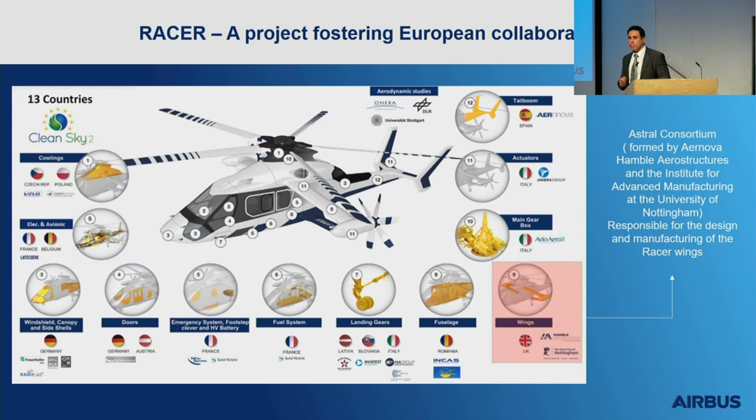Now, what are the main objectives of this project? We want to demonstrate that we can fly 50% faster than a conventional aircraft. We want to demonstrate that we can cover twice the surface that a conventional helicopter can cover in 1 hour. And while doing that, we save some emissions, both in terms of fuel consumption and noise footprint. On top of that, we want to demonstrate the affordability of the formula, because the best innovation is the innovation that is able to meet the market needs.

What are the missions where speed matters? There are many missions in the civil world, like search and rescue, emergency medical services, intercity shuttle, police missions, where speed will bring added value to the citizen and the potential customers we have in front of us.

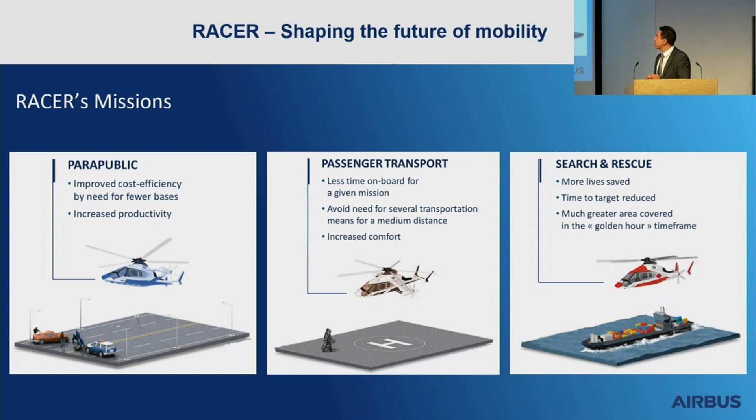So now let's go a little bit more into the technical field, how the Racer formula works and flies. What we have to consider is that the limiting factor for conventional helicopters is the speed at the tip of the main rotor blade. When you add the rotational speed and the advancing speed of the aircraft, you are close to Mach 1, and it's something that is not viable for a safe flight - this is our limit.

So the first thing you have to do when you want to fly faster is to decrease the rotational speed of the main rotor. When you decrease the rotational speed of the main rotor, you have less lift. And that's why we have the wings, because as we have less lift, we need to compensate.

And then the second parameter that is key for the high speed is the drag. We need to reduce the drag at the minimum, otherwise the formula will not be competitive in terms of power needs, efficiency, speed that we can reach.

For that, we want to keep the rotor as flat as it can be, with not a lot of collective pitch, not a lot of cyclic pitch, and if possible, zero. So that the rotor at the end is very flat and acts like a wing. And we don't use the main rotor to provide the propulsion force to reach the speed.

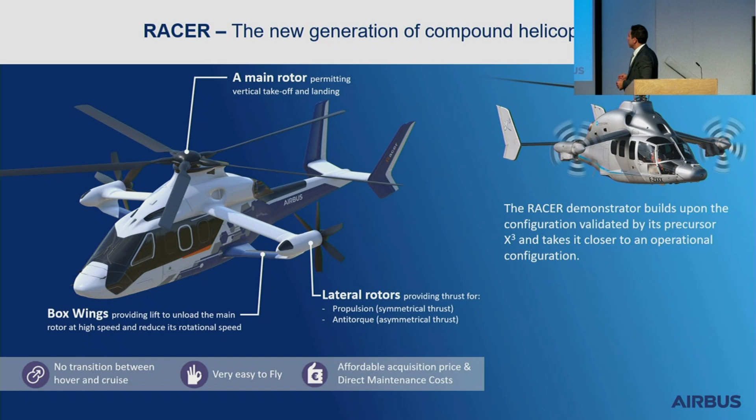I spoke about the drag, and I want to illustrate a bit the efforts we did in order to reduce the drag. A little bit later during this presentation, I will give you some numbers, but first of all, I will describe the theory that we had.

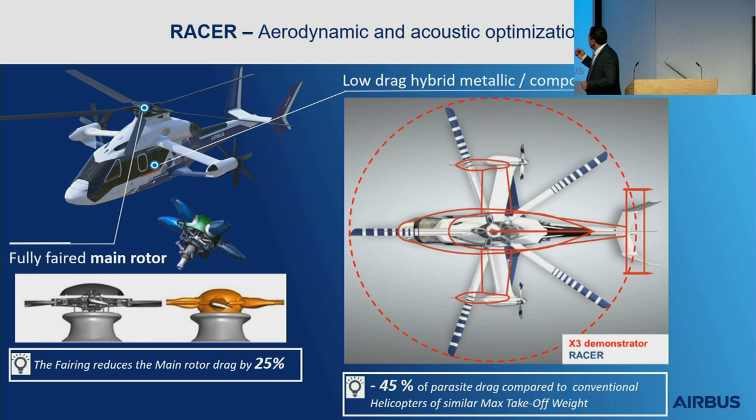In red, you have the lines that represents what should have been the X3 if we would have done it at the same weight of the Racer. So you have seen that between the X3 and the Racer, we did a lot of efforts, mainly on the fuselage, to limit the width at the minimum without jeopardizing the comfort.

In parallel, we worked a lot on the main rotor with a full fairing of the main rotor so that we limit the drag at the very minimum, and you can see that theoretically we should be able to save 25% of the drag of the main rotor. And in total, in theory, we have a reduction of 45% of the drag when we compare to the helicopters that is in the same range in terms of mass.

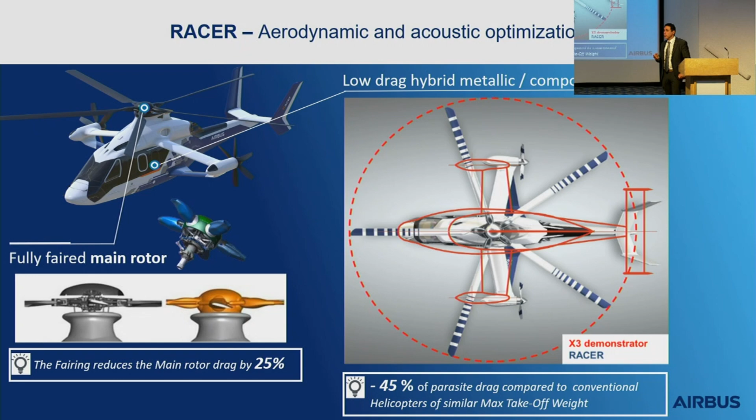I told you the wings are a key element of this formula, and it is true. And I will explain you why. There are some reasons why between the X3 and the Racer we decided to implement these box wings.

The first is that we decided to put the lateral rotors in pusher position and to implement the box wing so that it protects the people that want to embark or disembark in the cabin. In fact, we created a safety area that you can see here where the blue arrow is, so that the people are in total security when they embark and disembark in the aircraft.

There is approximately 7 meters to walk when you disembark to be close to the lateral rotor blade. And it's protected by the box wing.

The second reason to implement the box wing is the fact that when we have only one wing, we penalize the formula because seen by the rotor, the surface of the wing is quite big, and the downwash effect is detrimental for the hover phase. When we are able to superimpose the two wings, we limit the surface seen by the main rotor, and we improve the performance in hover.

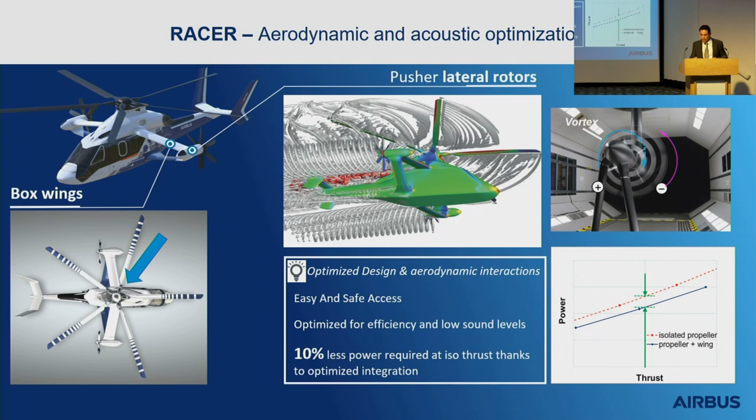We also have an asymmetric tail boom, patented, as well as the box wing, on this demonstrator. This asymmetric tail boom is here to improve performance in hover. When the downwash of the rotor blows air through the profile we've defined, it creates a force in the lateral direction that helps the lateral rotors provide the anti-torque function. We expect about 10% improvement. And here again, this is something we've already checked during the 8 hours of flights we performed. It works.

By the way, this is one technological brick we can use on conventional legacy fleets, because it will also improve the hover performance of conventional helicopters.

On the left side, you also have the flaps mentioned. On both the upper and lower wings and the vertical fin, we have flaps actuated with electromechanical actuators. These are secondary flight controls we use to fine-tune the equilibrium of the aircraft during all flight phases we want to optimize. I'll come back to this a bit later when I speak about noise reduction.

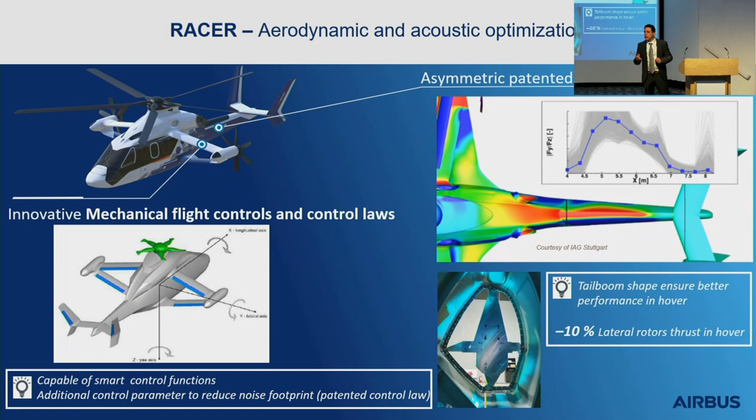And on top of that, all the upper deck - engines, main gearbox, rotor mast, rotor blades - are fully compatible with a conventional aircraft. You can take it and put it on a conventional aircraft, and it works.

In the specification of the main gearbox, co-developed with our partner Avio Aero in Italy, we put the requirement that it shall be compatible with a conventional aircraft. It means we have the capacity to implement a rear output so that we could transmit the torque to a tail rotor if we want to use it on a conventional aircraft.

And then you have to come back a little to the affordability I mentioned at the beginning of the presentation. We believe that if we're able to provide solutions that can be used both in conventional architecture and in high-speed architecture, in the end, for potential customers, civil or military, it will be an advantage. All the systems I described here represent the main part of the cost of a helicopter, both for acquisition and also for operational costs, notably maintenance.

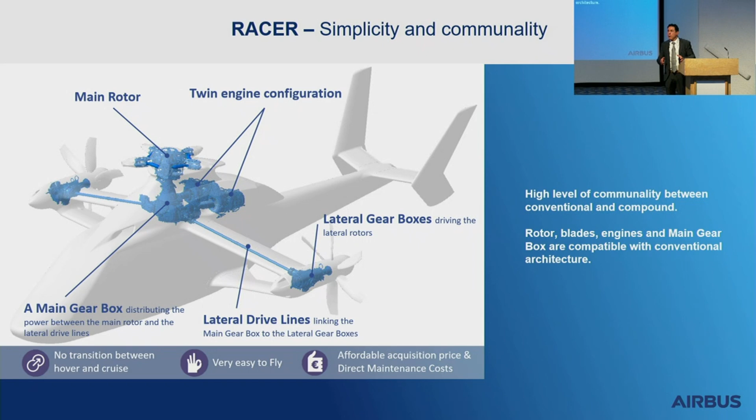So at the end, we want to make it simple and to be able to reuse the maximum of parts that we have across different formulas.

Something very important that I didn't mention too much in previous presentations is the longitudinal center of gravity of this formula. This formula is perfectly centered in terms of longitudinal center of gravity, and it's a key point for aeronautics today. It means this formula is stable without any additional help - we don't need the autopilot to pilot it, because it's perfectly centered. And there's a lot of implications from that.

We have robustness of the development, and also the fact that managing the failure of systems involved in the autopilot, for example, is much easier, because in case of failure, it's not catastrophic.

And why are we able to obtain this center of gravity? I need to mention that between the preliminary design review in 2018 and the first weighing of the aircraft in 2024 - 6 years - we didn't degrade the center of gravity location by any millimeters.

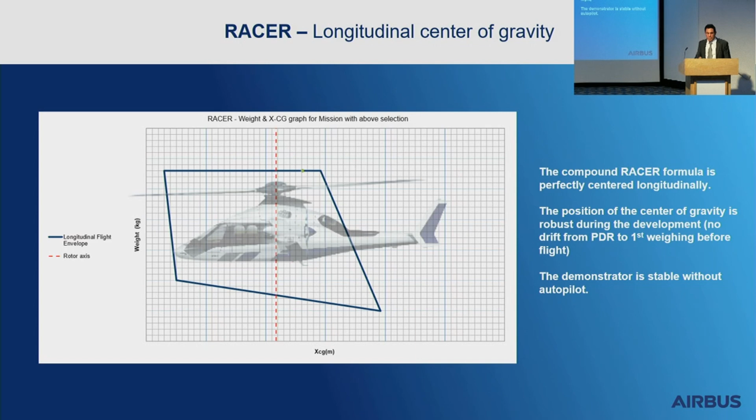What did we do during the first flight test campaign? So we did 8 hours of flight, as you mentioned in the introduction.

We made the first ground run on the 6th of April 2024, and the first flight on the 25th of April 2024. We flew up to 80 knots before stopping the flight because we have a small chip in the chip detector of the main gearbox. It's something which is quite usual when we do the first flight.

Everything is not fully clean, and sometimes we have this kind of events. What was really interesting is the discussion between the pilot and the flight test engineer during this flight. You can imagine that the pilot wanted to go on, and the flight test engineer said, no, it's a chip detector, it's a chip of the main gearbox, we need to control. So at the end, they stopped the flight.

Then flight number 3, we were at 170 knots. So it was really exciting because it was already a speed which was quite significant, and we didn't encounter any big issues in the measurement that would allow us to think that something is going wrong. So we had some increase of vibration, but limited, no instabilities. They performed at that time some turns at 60 degrees of bank angle, so very high turns, and nothing happened.

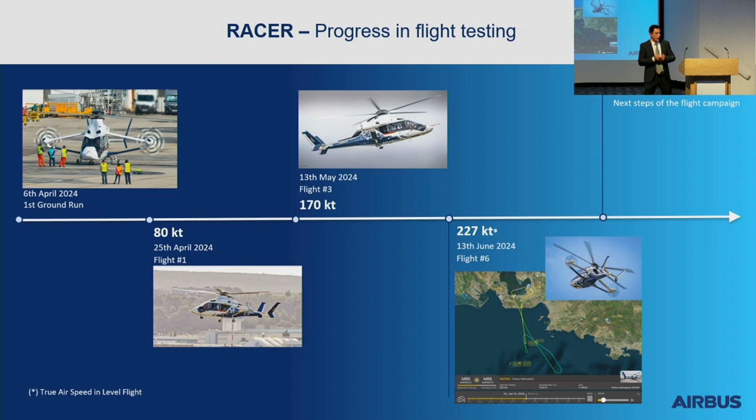Design to drag. I told you drag is key for the formula. For the high speed, drag is key. And in fact, now I can give you some idea what we reached with the Racer.

Analyzing the flight data, we discovered that in fact we have been able to overpass all the targets in terms of drag reduction. The Racer demonstrator is between 7 and 8 tons. And when we compare the drag of the Racer demonstrator to other aircraft that we know, we are comparable to an H125, a squirrel. So it's lower than a 3-ton helicopter and comparable to, even less than, a squirrel.

So it's to give you a little bit of the feeling of what is the effort that we have done on this aircraft. And when compared to what we did on the X3, in blue you have the current AH fleet, but if we take other fleets it will most probably be the same curve. For the speed record of the X3, we did a special effort in order to reduce the drag and reach the 255 knots.

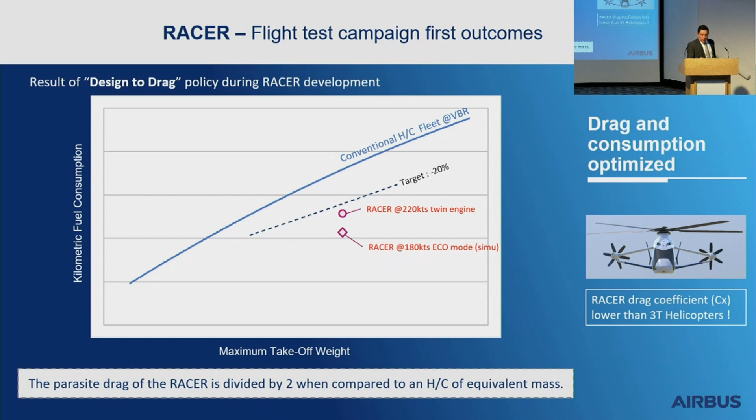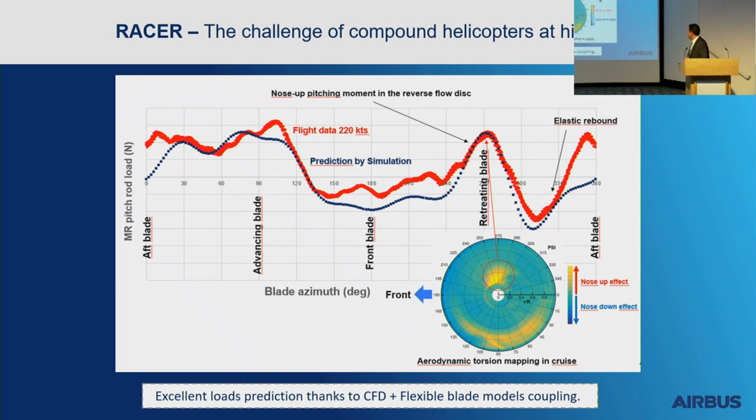So what is next? We are currently preparing the second flight test campaign. During this second flight test campaign, we will have more speed. Shall I give a number? We will target to reach 240 knots in cruise due to the low drag that we have. There will also be mission demonstration, eco mode function, and noise reduction.

For the mission demonstration, we speak about civil and military application. For the civil, we will try to demonstrate what the aircraft is capable of in terms of range, speed, and cabin use. You can imagine we take off from a heli deck, fly quite fast and quite far, hoist someone, and then come back. We can imagine doing Paris to London, door to door, Issy-les-Moulineaux to London City Airport.

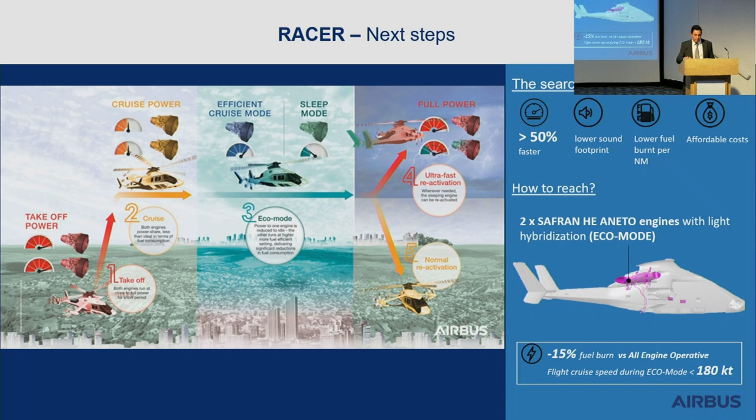Noise reduction. You have seen in the video that we have the possibility to control the inclination of the rotor with this formula. Why is it the case? It is because we have an additional degree of freedom compared to conventional aircraft due to the fact that with the lateral propellers, we are able to generate a moment around the pitch axis. So at each point of any trajectory during the flight, we are able to control and to decide what will be the inclination of the rotor.

And if you consider that the noise perceived on the ground by the citizen is coming from the blade vortex interaction, you can make the link between the fact that we can incline the rotor at each point of the trajectory and the reduction of the BVI. So we will implement in the autopilot a low noise law that will use this capacity so that we choose at any time the best inclination of the rotor in takeoff, and in approach and landing phase and takeoff also phase, sorry, so that we have the first blade which is creating the vortex, and the second one which passes a little bit higher or a little bit lower than the vortex generated. And then, by that possibility, we reduce the BVI.